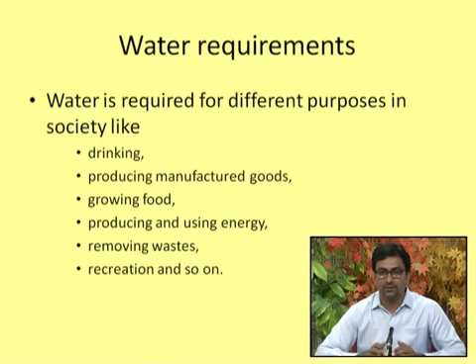So water is also a requirement in this case, and we need water for recreational purposes - many recreational facilities are based on water.

Apart from those mentioned areas, the water required for each of these activities changes. The impact on total water requirement is affected by climatic conditions.

Within India, there are many states - some are hot, some like Kashmir are cold. So the total water requirement, or per capita water requirement - not only for drinking or agriculture but in total on an annual basis - whether for different states or different countries globally, climatic conditions play a greater role in deciding the total water requirement.

We have to take care in calculating total water requirement within our country, state-wise or district-wise. Within Gujarat, certain parts are very hot, like the Rann of Kutch or Saurashtra, and if we move towards the southern part of Gujarat, it's not as hot as the western parts like Bhuj and Kutch. So the water requirement for drinking or agriculture is different in the southern part of Gujarat state.

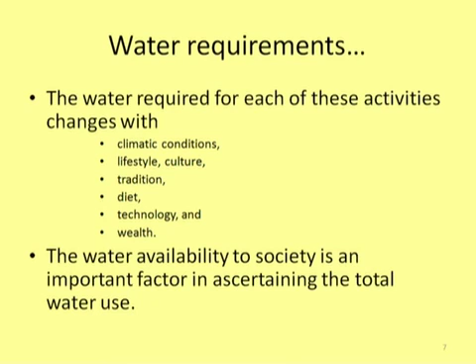The water availability to society is an important factor in ascertaining the total water use, and this is reverse of what we calculate. First we calculate and then decide what should be the water quantity available. Here in the second statement, water is available this much only, and we have to deal with that much water quantity, so if water availability is restricted, we have to have restricted water uses all through.

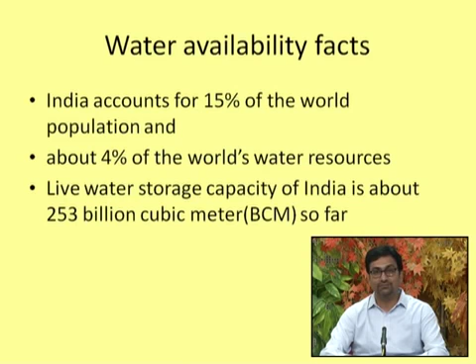Some of the facts which we need to discuss while understanding the water infrastructure facilities, water structures, or for that matter hydraulic structures. So water availability facts: India accounts for 15% of the world population, and about 4% of the world water resources. This is a very big mismatch, so per capita availability of water is going to be less. In comparison to many other countries, India's per capita water availability is going to be less.

Live water storage capacity of India is about 253 billion cubic meters so far. This is live, which is usable, which can be made available to the use of the general public in the country. So live water storage capacity in form of dams, ponds, tanks, all through, is about 253 billion cubic meters, BCM, annually in India. BCM is the unit mostly taken to calculate the per capita requirement and per capita availability.

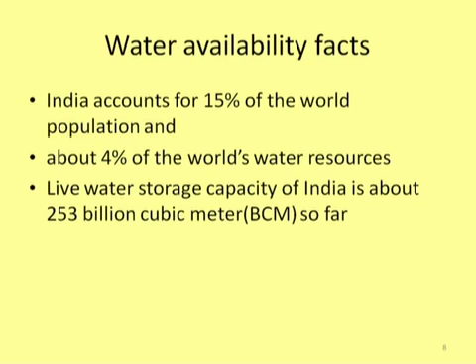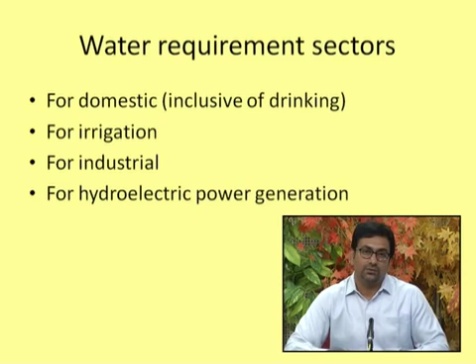in the domestic domain. Likewise, we need water for irrigation, industrial, and hydroelectric power generation. We have already talked on these topics, but these are definitely sectors where water needs to be predominantly supplied. Water requirement sectors are also navigational, especially that we need to maintain depth for the large ships carrying cargo. In many rivers, these navigational facilities are provided, and depth should be maintained, so we need water for that purpose.

For recreational purposes, water is required. For fishery, a large quantum of our population is dependent, and fishery is also a prominent business, or say a livelihood area in coastal regions. So for that purpose, we need to maintain the water requirement, and for maintaining the ecosystem, a certain part of the water needs to be maintained in the river.

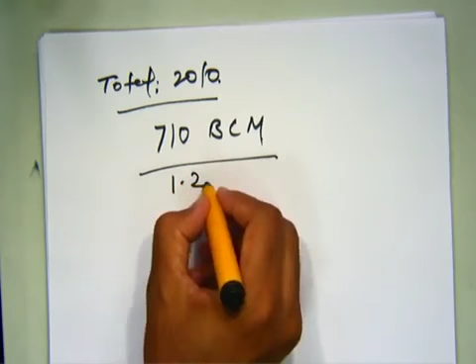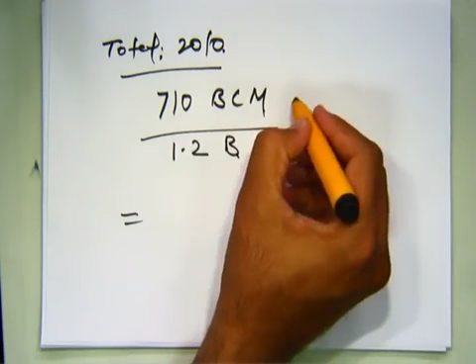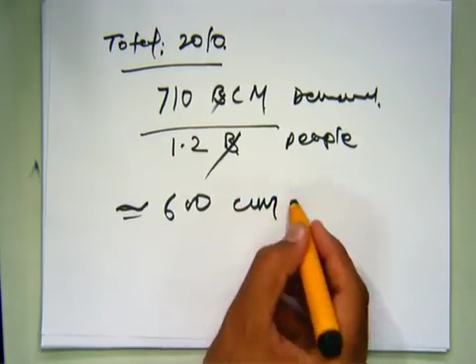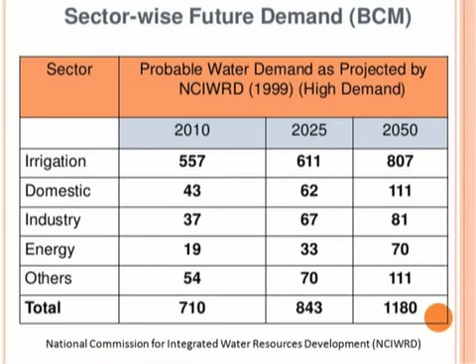If we take the population during this similar time period, we can assume a total population of 1.2 billion in the country. Then per capita, this is population, the people in our country, and this is total water demand. Now you cut it short here. What is coming out is approximately 600 cubic meters of water required per capita. This is the requirement. Earlier we have seen what is available is less. So we need to be very vigilant to mitigate or fulfill such demands in this society.

This scenario shows that the availability of water is not as per the requirement, that water is available in lesser quantity. So we have to conserve water to meet the water requirements of the future, like the projections of 2025 and 2050. We have to go for conservation methods, controlling our water requirements through adopting best practices, technology, and various methods to increase the efficiency of what we have today in our hand. So we have to understand what water conservation is first, and then we'll switch over to various methods of conserving water.

Water conservation refers to preservation, that we are preserving it, we are keeping it, we are not wasting it. Control, we are controlling it, not letting it go. And development of water resources: ponds which store lesser water, we have to develop them to store more water, not allowing this water to go, not allowing that water to get exploited.

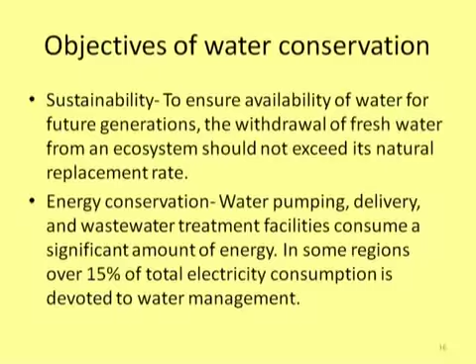One more objective of water conservation is habitat conservation: minimizing human water use helps to preserve freshwater habitats for local wildlife and aquatic life, as well as reducing the need to build new dams and other water diversion infrastructure.

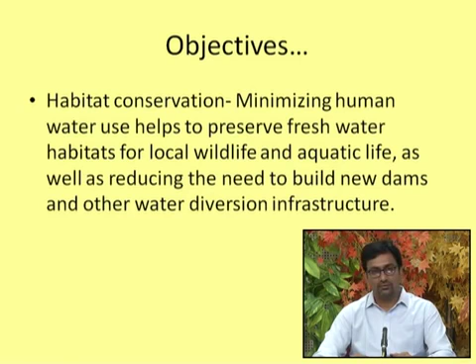What it says is that if we are conserving water, then water is available in the water channels, rivers, ponds and lakes, and ultimately we are preserving habitat, say wildlife or aquatic life, fishes, or whatever is growing in the water, that can be saved. The second point is that there would be lesser requirement of diversion structures and construction of dams if we are conserving the water. So ultimately this objective leads to saving of funds and also habitat conservation.

Now we are switching over to methods of water conservation. We have seen the objectives of water conservation. We have seen the need, the availability of water, the requirement of water, and per capita requirement of water. Now let us see how we could conserve. What should we do so that water can be conserved, and what things lead to conserving the water? A water conservation method could be an action, device, technology, or improved design.

Conserving water doesn't mean that we are just switching off a tap which is running, or repairing some water supply pipeline which is damaged. Is that only water conservation? Certainly not, because 80% of water required is in agriculture. If we do not switch over to some actions, devices, technology, and improvements in all these areas, then we are not making efficient use of water in such heavy demand sectors of water, like agriculture.

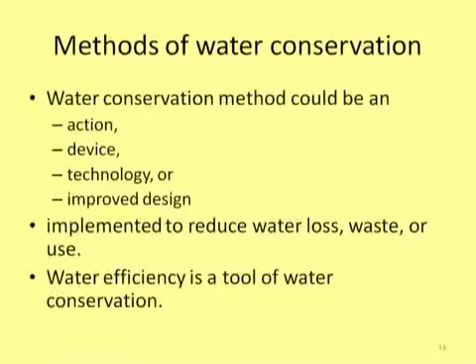These are a few methods which are traditionally used to conserve water. They are available in many books, also in the GTU textbook for Elements of Civil Engineering, many other books, and on internet websites you will find these methods for water conservation. So for how to conserve water, we should harvest rainwater.

Generally you people create and fabricate models and display them in many technical events in colleges and other places: rooftop rainwater harvesting. We collect the water at the roof of all the built-up infrastructure in cities, towns and villages, and that collected water is led through a system of pipes into a recharge well, so that water becomes part of groundwater, and we can fetch it when we require. Certainly not the same water, but we are recharging the groundwater and taking out some part of that.

So we can say that we've contributed some part into the groundwater. So rooftop rainwater harvesting is one of the very popular water conservation methods adopted in rainwater harvesting.

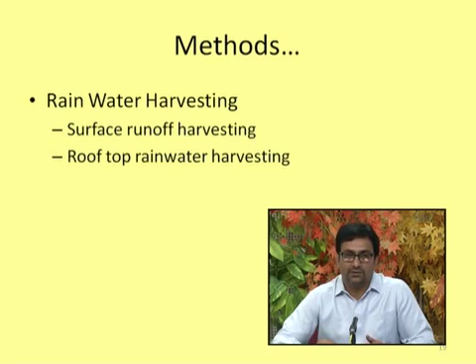So construct bunds, construct check dams, construct ponds in your house, in your farm, in your backyard, and preserve that water where you stay. So that is the holistic concept of watershed management, where you have a stake in claiming the water.

One of the prime things in a surface water conservation system is that we are not allowing that excess water to flow into the ocean and ultimately become salty water. Rather, we are preserving it, letting it down to join the groundwater, or storing it in dam reservoirs, or through the weirs into the channels, and applying it to different requirements. So this is one of the methods of water conservation, that we are harvesting the rainwater. We are not letting it go.

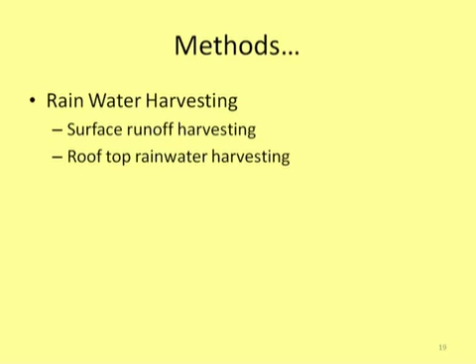Now, lakes and depressions. Mostly the lakes are getting filled with sedimentation. As I talked, during heavy, intense rain there is erosion and then sedimentation of depressions and lakes, and the storage capacity is getting reduced. With lesser storage capacity, the rest of the fresh water is just joining the channel and leading to the oceans or brackish or saline water bodies, making it unsuitable for use. So we have to increase the storage capacity of such bodies, which can be increased by desilting and widening.

So that care we can take at our town level or village level: the pond available, let us dig it up, let us go for widening of that pond. There are such society-driven projects we can take up for conserving water by increasing the storage capacity of lakes. And depressions are mostly used to store water for the short term and allow it to seep down through the topsoil, so that it becomes at least soil moisture for 15 or 30 days. In the longer term, it will trickle down and become groundwater. So that is also a method of water conservation.

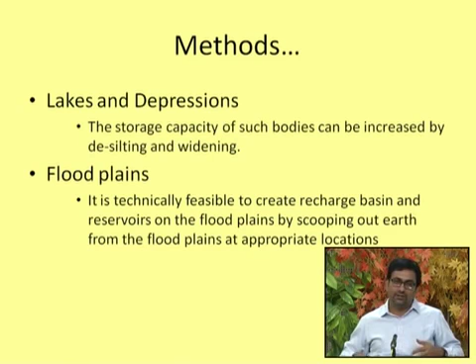And we generally do not take it into consideration as a water conservation method, but we can take it as part of it through proper planning, scooping out, filling it with water and then allowing it to trickle down. In a longer time period, it becomes our water reserves.

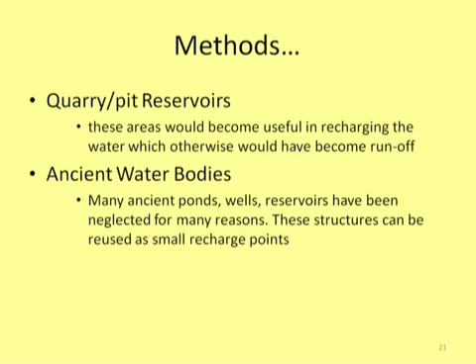A simple method is that there are quarries and pits along railway lines, road lines, and such, and these pits get flooded with rainwater. They get filled with rainwater, but mostly the water gets polluted, and the recharging is not proper. Most of the water gets lost through evaporation, and very little water trickles down or infiltrates into the soil mass. But if we maintain these quarries or pits along the roadside or railway lines to make them suitable for recharging, they can become a very good part of water conservation methods.

We can also think about regenerating ancient water bodies, like many ancient ponds, wells, and reservoirs that have been neglected for many reasons. These structures can be reused as small recharge points. Definitely, they would contribute to water conservation if we maintain them.

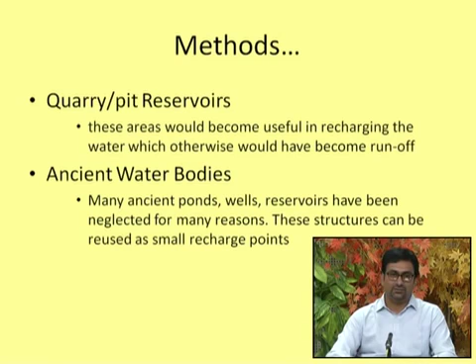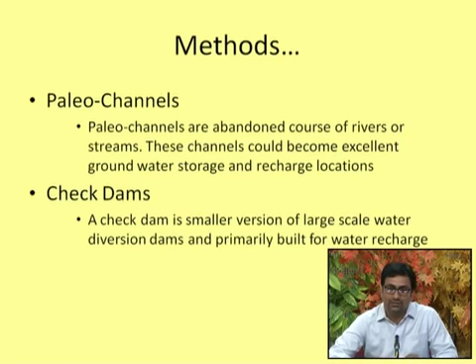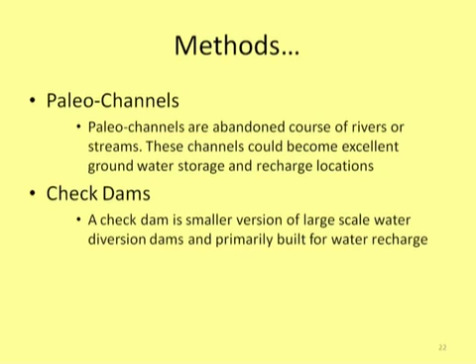Water is stored for two purposes. One is to check soil erosion in agricultural farms. This is a very big trouble, productivity suffers because of erosion of the soil. Mostly in areas where there is a steep slope on the farm, we have to curtail the water velocities flowing overland. So check dams are constructed to arrest soil erosion, and at the same time, the stored water gets infiltrated through the soil mass or through the banks of the check dam. Check dams are not like concrete dams, they are made out of locally available soil, so they themselves seep through, and mostly water gets infiltrated through the body of the check dam into the soil mass. This is also a very good method of conserving water.

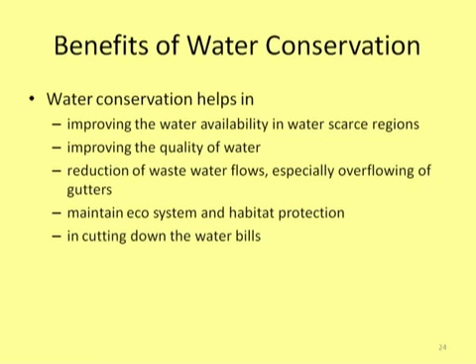What are the benefits of water conservation? Quickly, because we are running out of time, I'm taking these few points very quickly. Water conservation helps in improving water availability in water-scarce areas, improving the quality of water, reduction of wastewater flows, especially overflowing of gutters, maintaining ecosystem and habitat protection, and cutting down water bills. So these are a few of the benefits of water conservation. There are larger benefits which we'll learn later.

Thank you very much. What we learned today is the importance of water conservation based on water requirements and water availability. Thank you very much.